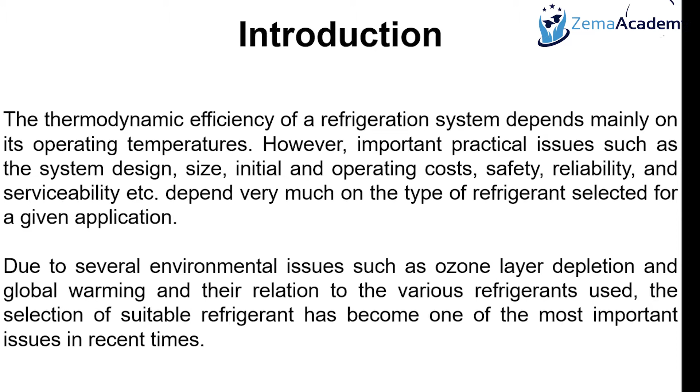Okay, yes, you have the majority of the definition. So a chemical or substance used in mechanical devices for what? Would it be refrigeration cycle or heat pump cycle? Yes, it's for mechanical devices, refrigeration systems or vapor compression systems, but what is that chemical used for? What is the primary function of the refrigerant?

Cooling. Transferring heat? Yes, mainly transferring heat. It could be cooling or heating, but transferring heat from A to B. So you're either rejecting heat to the atmosphere, which we've looked at using the condenser, or absorbing heat from the atmosphere or ambient, which happens in the evaporator.

So ultimately, the refrigerant is doing both functions. In the evaporator, it's taking heat, it's absorbing the heat, so therefore it gets boiled or evaporated easily. And in the condenser, it's doing the opposite function - it's used to reject heat into the atmosphere. So primarily, the function of the refrigerant is a chemical or substance used for transferring heat from A to B.

So let's continue - now that we have a common definition, a chemical I may often refer to as a substance, or I may refer to it as refrigerant. So when I say chemical, substance, refrigerant, I'm referring to the same thing. Used not only in cooling systems, refrigerants are also used in heat pumps for both heating and cooling, in mechanical devices like refrigerators or air conditioners. And as I said, ultimately it does both functions - it absorbs heat in the evaporator, but also rejects heat in the condenser.

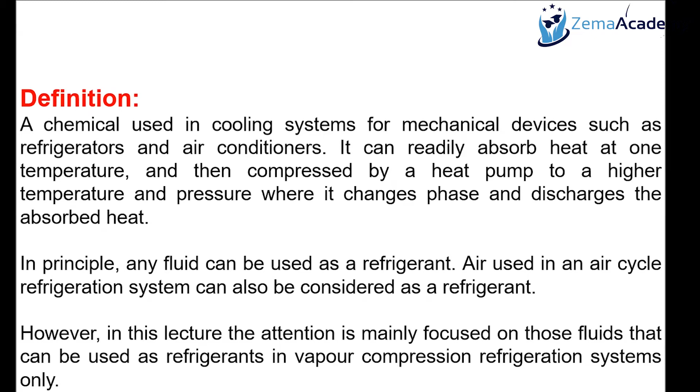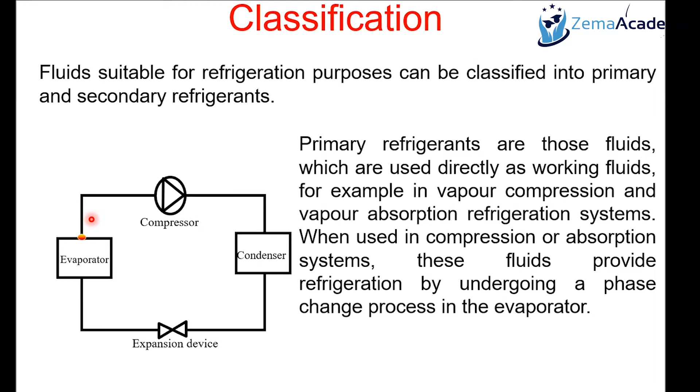So ultimately, we can classify refrigerants as primary and secondary refrigerants. We'll look at the definitions of what a primary refrigerant is and what a secondary refrigerant is. The primary refrigerant is the one inside here that is constantly and continuously changing its phase, from gas to liquid, liquid to gas, back and forth. So those are what we refer to as primary refrigerants.

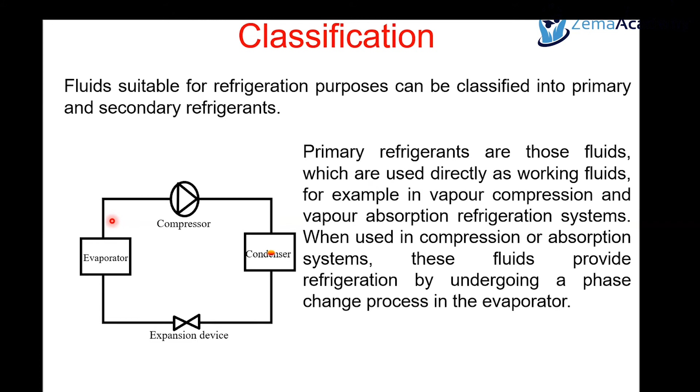The secondary refrigerant, I'm sure by now you've guessed, is the medium that we use to reject the heat into the atmospheric air. For instance, when we look at the condenser, we've seen how to classify condensers based on either water-cooled or air-cooled condensers on the secondary circuit. Here we can see two ways: the yellow animation assumes it's water, and then we've also got a fan blowing air.

So the secondary refrigerants refer to the secondary medium that we're using to extract the heat. We can use water as a secondary refrigerant provided the operating temperature is above 0 degrees C, as long as the environment on the secondary circuit is above 0 degrees C.

But the only time we may have difficulty is in colder areas, where water will start to freeze. The solution to that is to use antifreeze solutions, brine solutions. So, can we use water as a refrigerant? Yes, we're using water as a refrigerant on the secondary circuit, but we can also use antifreeze brine solutions to minimize freezing.

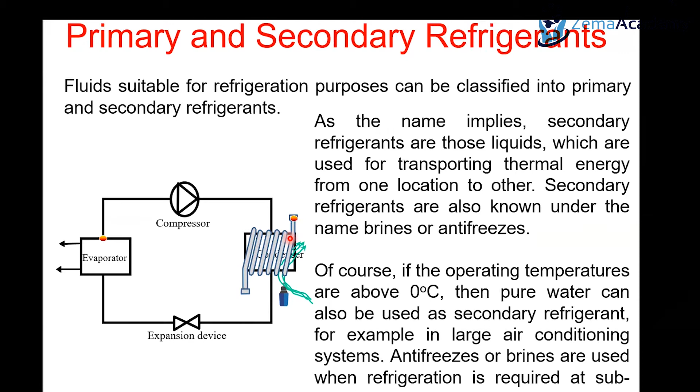So now we know refrigerants can broadly be classified as primary refrigerants, which constantly change phase, and secondary refrigerants on the secondary circuit, which are the medium we use to extract heat. It could be water or it could be air. Those are the secondary refrigerants.

So if one was to ask what's the difference between primary and secondary refrigerants: the primary refrigerants are constantly changing their phase, constantly boiling and condensing. Inside the circuit, the primary refrigerants are constantly changing phase from liquid to gas and gas to liquid.

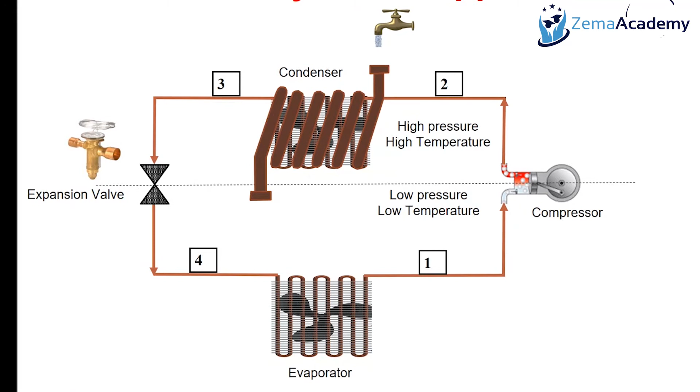Whereas the secondary refrigerants do not change their phase. They are constantly or always liquid; they don't necessarily have to change phase. So that's primarily the difference between primary and secondary refrigerants: primary refrigerants are always changing their phase, but secondary refrigerants don't change their phase or state.

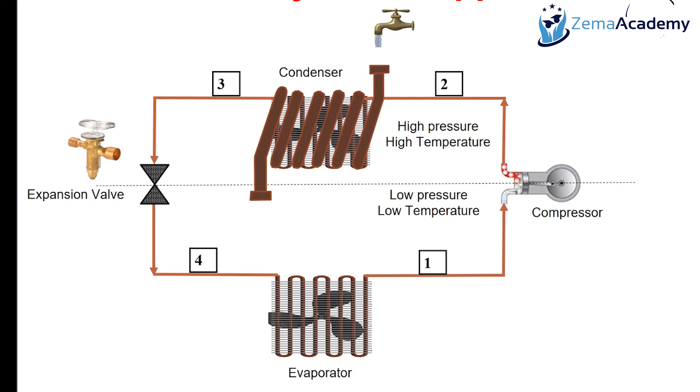Now that we know the definition of a refrigerant and how to classify a refrigerant, what are the selection criteria for selecting the best refrigerant? There are primarily 4 selection criteria you need to consider: the thermodynamic and thermophysical property. We'll look at one by one what we mean by thermodynamic and thermophysical property, an important aspect in deciding what kind of refrigerant you may want to use in a system.

Environmentally friendly - again, one of the primary and dominant discussions everywhere is how we can develop an alternative low GWP refrigerant, and how it needs to be non-chlorine, non-fluorine, and non-bromine containing chemicals or substances.

Safety consideration - again, we'll look at what we mean by safety consideration. You don't want to specify a chemically hazardous refrigerant. We'll look at one by one what we're actually referring to by safety considerations.

And economics - of course, cost is the first aspect you've talked about. Is it well proven? Has it been used before? Is it low cost? And availability - would it be available for the medium to long term? So those are the 4 primary selection criteria you can consider in order to reach and select the best environmentally friendly refrigerant.

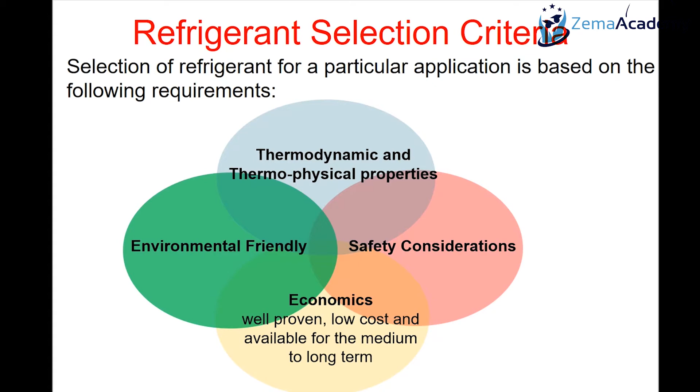Okay, we've talked about thermodynamic and thermophysical properties, so let's look at what we meant by these and how we should consider them.

So far, when we've looked at the vapor compression system, we've looked at the importance of the relationship between pressure and temperature. If you increase pressure, you also increase the temperature; if you reduce the pressure, you also reduce the temperature. So the boiling point and the freezing point of a refrigerant, in terms of temperature and pressure, is one of the criteria we need to consider.

The discharge pressure and the pressure ratios matter too. We've looked at how a system, depending on the pressure ratio and the condensing and evaporating pressures it operates at, could perform well in terms of COP, or it can struggle and have very low COP. Those of you who did the experiment may have started to plot this and look at the relationship between condensing pressure and COP. The higher the pressure ratio, the lower the COP, and the higher the power consumption of the compressor.

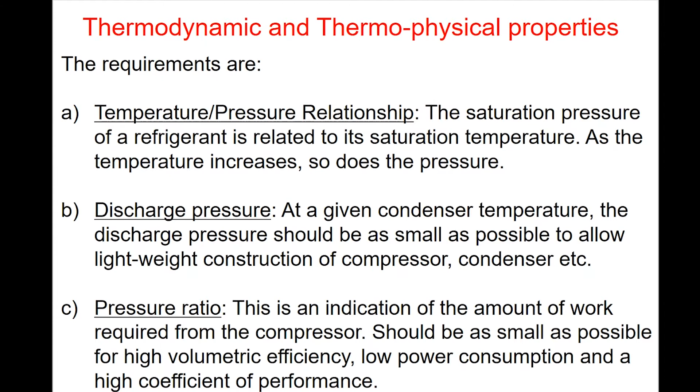The latent heat of vaporization: we've looked at how we can calculate this based on the mass flow rate of the refrigerant and the heat of vaporization, the difference between the inlet and outlet of the evaporator. Also, if you know the freezing and boiling point of a refrigerant, it indirectly tells you the amount of heat you may need to boil or freeze that refrigerant.

And ultimately, it's that energy that we're interested in. If we can get away with a very small amount of energy input into the refrigerant, then it's preferable.

We've looked at the isentropic index and how it's important, depending on the type of refrigerant we use, but ultimately the overall losses in the system are also interlinked between the two.

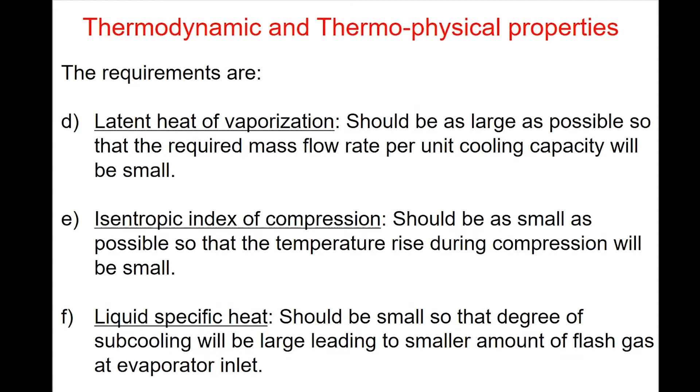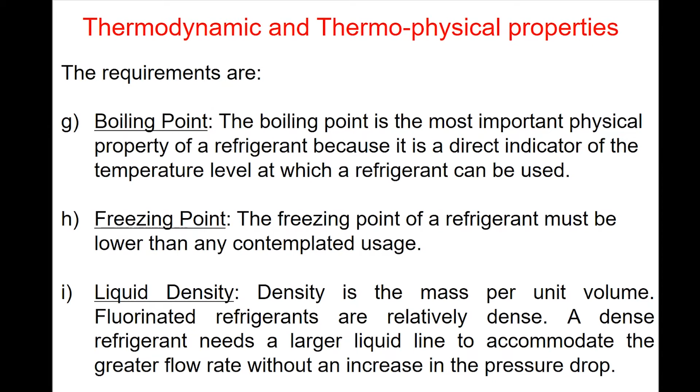Specific heat is also important in terms of the properties of the refrigerant we're using. We've talked about the boiling point and the freezing point, and the density would also affect things—when you have a very dense refrigerant as opposed to a slightly less dense one, it affects the pressure drop in the circuit. Again, when we looked at the expansion valve, we saw how the pressure drop and the viscosity are other important parameters, because they relate to the pressure drop in the system and therefore the temperature drop of the refrigerant.

So all these parameters are what we call the thermodynamic and thermophysical properties of the refrigerant, and we need to consider all these aspects when we select any refrigerant. That's what we meant by the first selection criteria, looking at the thermodynamic and thermophysical aspect.

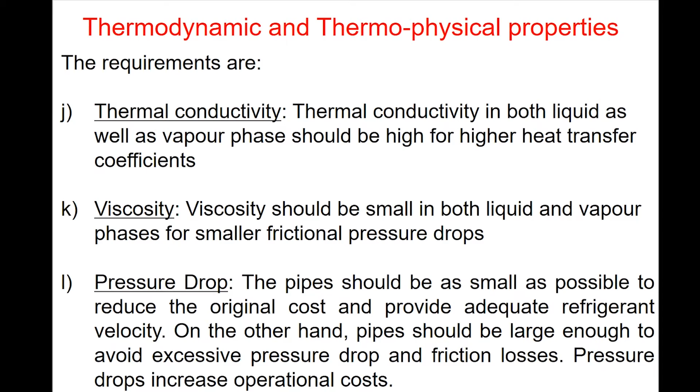The second selection criteria we looked at is the environmentally friendly aspect, or the impact to the environment—the environmental impact of the refrigerants, and of course the refrigeration systems we use in total.

It wasn't until the late 1980s, 1987 to be specific, that researchers found out that CFCs were becoming a major destructive factor to our lower atmosphere, or our ozone. When there's a leakage from refrigerants containing CFC type compounds, and they react with the sun's UV or ultraviolet rays, they easily break down. As a byproduct they release chlorine, which is responsible for facilitating the depletion or thinning of the ozone. So it was around 1987 that people started to talk about CFCs and their impact.

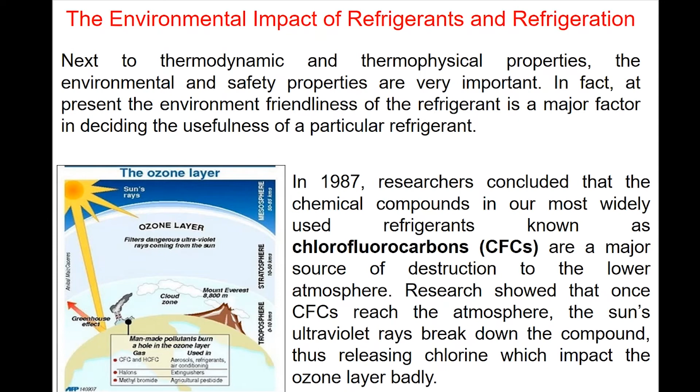So in general, when we look at the impact of the refrigerants and some of the chemicals that we're using, we're saying they're responsible for the depletion of the ozone layer in the stratosphere. And we're also saying they're responsible for global warming through the direct impact, which is the leakage, and the indirect impact, which is the fact that we need electricity to operate the systems.

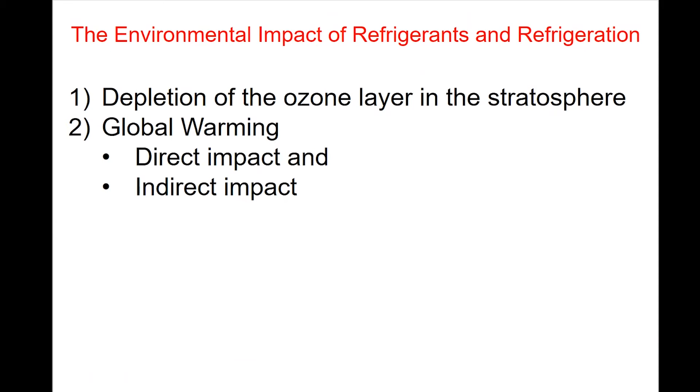That's what we're basically saying, the benefits of our ozone layer: it filters dangerous ultraviolet rays coming from the sun. So it's important that we deal with or minimize the impact of the depletion of the ozone layer. Otherwise, we will cease to exist.

Ultimately, we're talking about CFCs, HCFCs, which are ozone depleting substances. We will look at in a minute what we are referring to by ozone depleting potential or ozone depleting substances. Ozone depleting substance primarily refers to refrigerants which contain chlorine, fluorine, and bromine. Those chemicals tend to impact and easily react with ozone and facilitate the thinning or depletion of the layer.

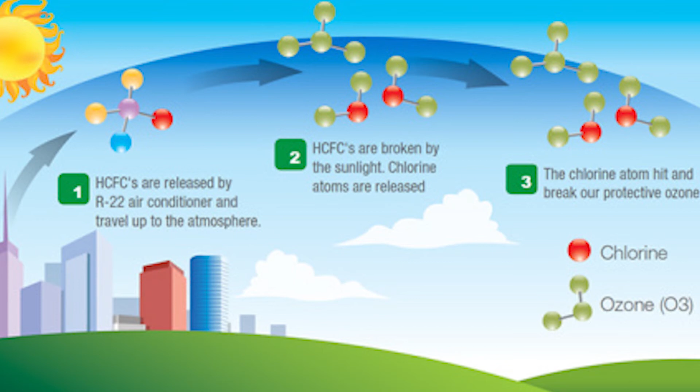So we talked about what happens if you thin it. Ultimately, there are huge implications. Let's just look at only two implications: how high exposure to UV rays can easily cause skin cancer as a result of the ozone depletion.

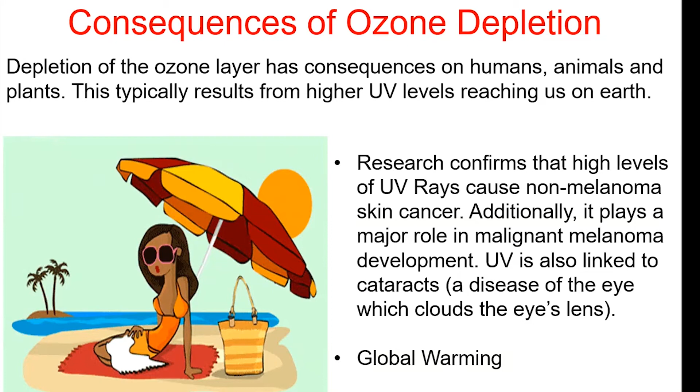We've looked at how exposure to high UV rays can cause skin cancer, and the impact of refrigeration generally, and what the implication to that is to our global warming and how we contribute to global warming. Primarily, approximately 1/4 of the effect is through direct impact, directly due to the leakage of the refrigerants, and 3/4 is generated through the use of electricity.

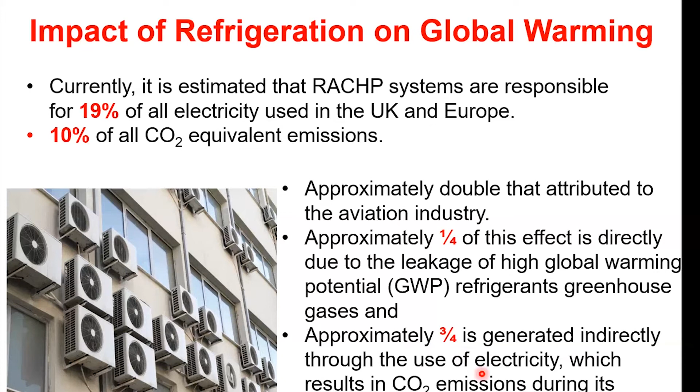So the direct impact is the leakage of refrigerants, and as we've seen in the previous slide, how they react with the sun's UVs and how they can easily break down or facilitate the depletion of the ozone. So that's the direct impact through the leakage of refrigerants.

And the indirect impact is the fact that we need to supply electricity to the systems to operate. In order to generate this electricity, unless we're using renewable energy, the chances are we will be using fossil fuels. So therefore, we are also emitting carbon into the atmosphere in order to generate the electricity for supplying the system's electricity requirement. That's what we're referring to by the direct and indirect impact of refrigerants and refrigeration systems.

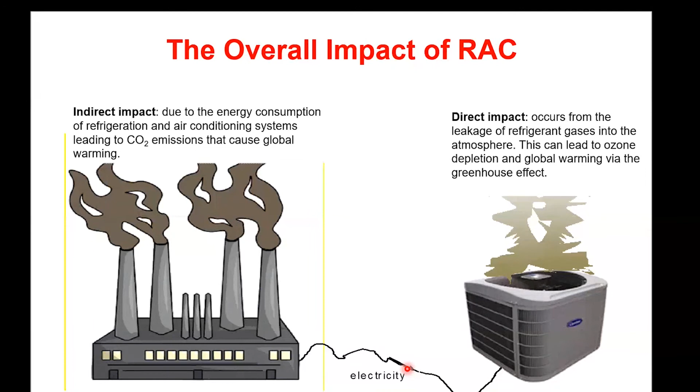So I think in the past few slides I've used the word ODP or ODS - ozone depletion potential, or ozone depletion substances. I've also used words like GWP, global warming potential. So let's look at some of the definitions, so when anyone is using them, you have a better understanding.

By ozone depletion potential, or ODP, we are actually referring to the ability of a chemical or substance to destroy the stratospheric ozone. We've looked at earlier how in 1987 researchers started to discover that CFCs are having an impact on the stratospheric ozone. So our benchmark is the CFCs. We compare all refrigerants to CFCs, which has an ODP of 1.

We look at GWP, and again our benchmark, our index, is carbon dioxide. So when we talk about ODP, primarily we are talking about whether the substance or the chemical that we're using contains chlorine, fluorine, or bromine molecules.

That's what it means, and we're comparing it to the CFC being the benchmark. So if someone is talking about how a refrigerant has 0 ODP, they're purely saying that the refrigerant does not contain chlorine, fluorine, or bromine, or any halogenated compounds. ODP, or ODS, is the ability of any chemical, refrigerant, or substance to destroy the stratospheric ozone. The ODP depends mainly on the presence of chlorine, fluorine, or bromine. So that's one index we use to categorize refrigerants and how the substance may contain harmful chemicals that can easily destroy our stratospheric ozone.

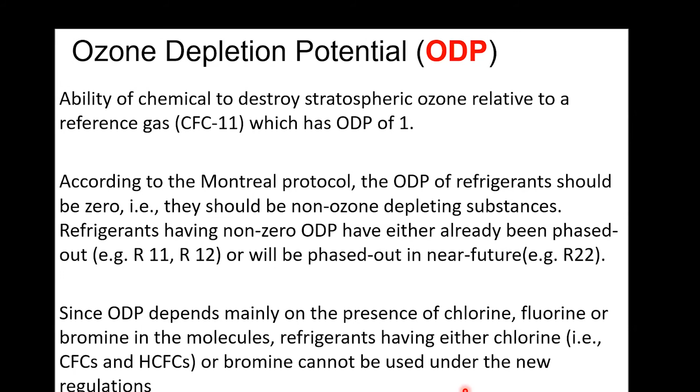So this is for destroying our ozone layer primarily. And there is another index we use, called the global warming potential. So we've looked at ODP, referring to the presence of chlorine, fluorine, and bromine, and we compare ODP to our benchmark, which is CFCs.

And the GWP, similarly, we use CO2 as an index. The definition of GWP is the ability of a greenhouse gas or substance to trap heat. I briefly talked about this earlier. When we compare different types of refrigerants, some of them are very, very high in trapping heat. So ultimately, GWP deals with the ability of the substance to trap heat in the atmosphere, and everything is compared relative to carbon dioxide, because when we talk about global warming, we talk in terms of carbon emissions, carbon dioxide emissions. So our benchmark or index is the CO2.

So on the ODP, our benchmark is compared to CFCs, the value of CFCs being 1. And in the GWP, it's compared to CO2, with the index of CO2 having the value of 1. We'll look at some examples.

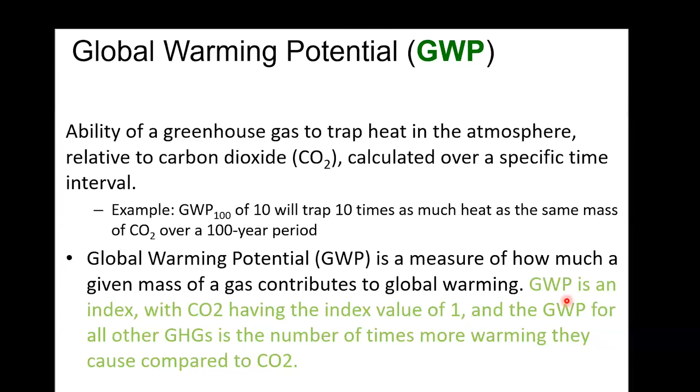In ODP, we're mainly concentrated or interested in whether the substance has chemicals like chlorine, fluorine, and bromine, and our benchmark is CFCs, at 1. And in the GWP, we're interested in the ability of the substance to trap heat, and everything is compared to CO2, CO2 being 1. We'll look at some examples.

For instance, let's take methane. One kilogram of methane causes 25 times more warming over a 100-year period compared to one kilogram of CO2. So as I said, everything is compared to CO2 - CO2 is 1. So in general, we can say methane has a GWP of 25.

So preferably, coming back to the question we introduced at the beginning, you would want a refrigerant with as low a GWP value as possible, to minimize and reduce global warming. You may have refrigerants with zero ODP - meaning the refrigerant doesn't have chlorine, fluorine, or bromine - but they may have a very high GWP value. A good example we've been using for the labs is the refrigerant R134A.

There's also a dilemma between the two indexes we're using. The refrigerant might be zero ODP, but on the other hand it might have very, very high GWP values. So we have to be able to balance - it may contain an ODP aspect, but the GWP is very, very low.

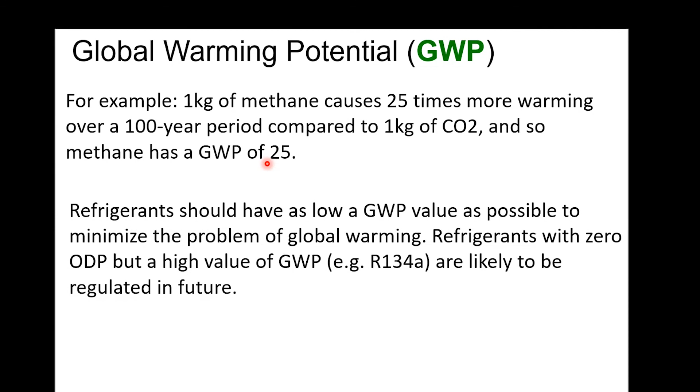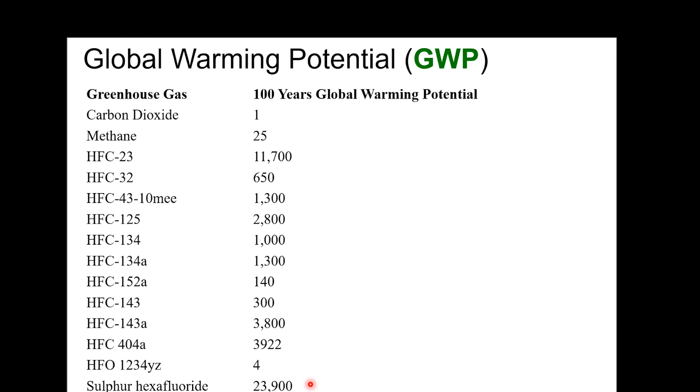So these are some of the GWP values for different refrigerants. Carbon dioxide is our benchmark, 1. Methane's ability to trap heat is 25 times that of carbon dioxide. The ability of HFC-23 to trap heat is 11,700 times that of carbon dioxide. So as you can see, HFCs compared to carbon dioxide have an extremely high capability of trapping heat in the atmosphere. I'm just giving you a few examples to understand what we mean by GWP values - everything is compared to carbon dioxide.